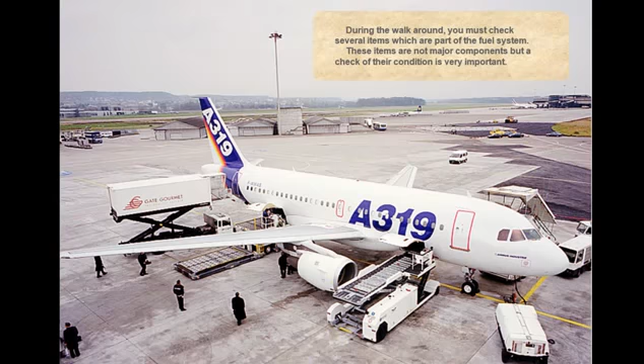Fuel can be measured manually by the magnetic fuel level indicators located in each fuel tank. We are looking at a magnetic fuel level indicator in the right inner tank. It should be flush with the aircraft surface.

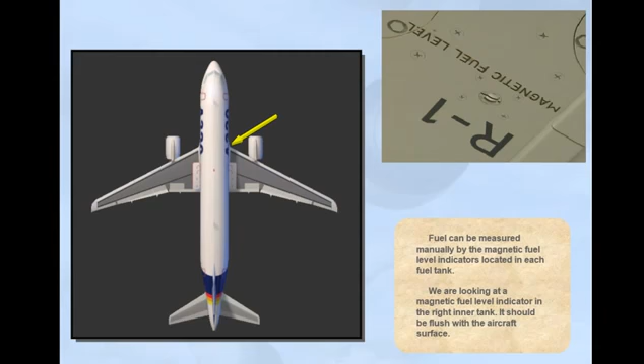We are looking at the water drain valve in the right inner tank. Each tank has a water drain valve. You should check that there is no water leaking from the valve. If there is a leak, call maintenance.

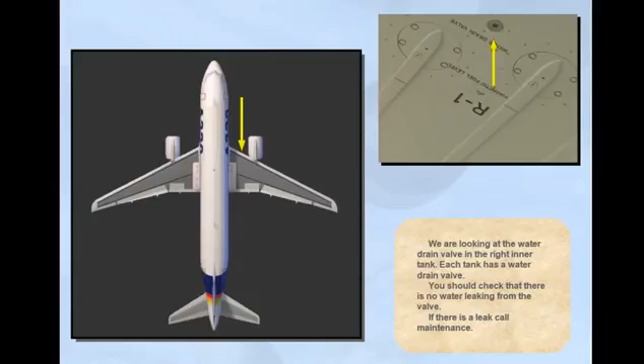A refuel panel is located on the fuselage side beneath the right wing. You should check that the refuel panel access door is closed.

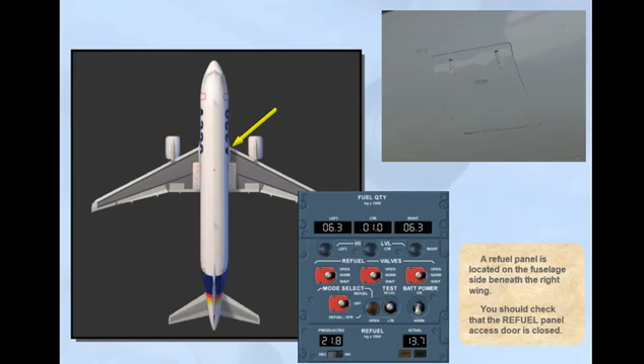A single refueling point is installed under the right wing. You should check that the refuel coupling door is closed. Note: another refueling point can be installed under the left wing as an option.

A surge tank is connected to the outer tank in each wing tip. These small tanks protect the system against overpressure and thermal expansion. You cannot monitor or control surge tanks from the cockpit. The surge tank inlet should be clear of any blockage.

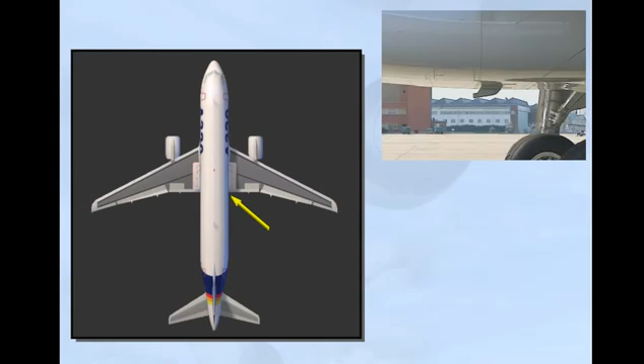There is also a shroud drain mast, which drains fuel that could leak from the system. You should check that there is no fuel leaking from the mast.

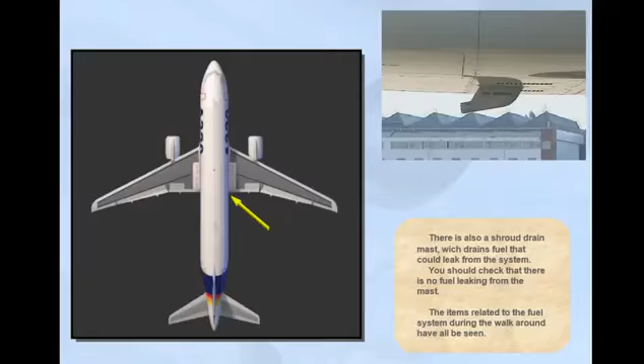The items related to the fuel system during the walk-around have all been seen. We will now discuss items related to the fuel system that you will encounter during cockpit preparation.

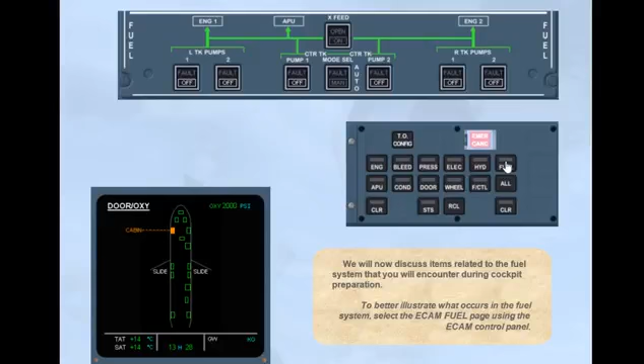To better illustrate what occurs in the fuel system, select the ECAM fuel page using the ECAM control panel. With the pumps in the off position, observe the symbology on the ECAM. The pumps are cross-line amber.

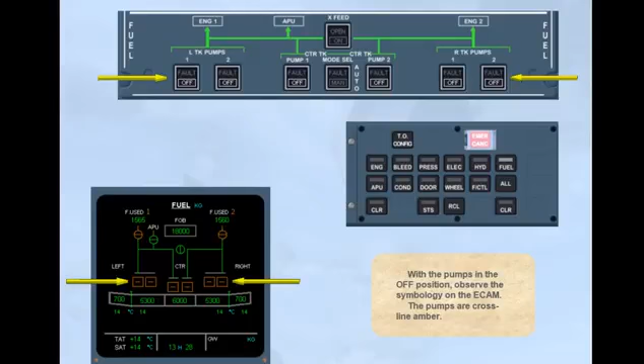During cockpit preparation, all white lights in the cockpit must be extinguished.

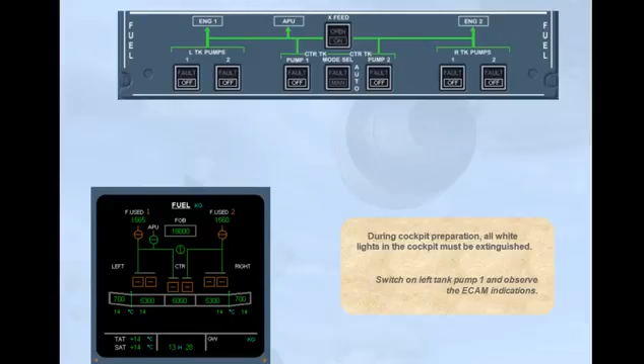Switch on left tank pump 1 and observe the ECAM indications. Left tank pump 1 on the ECAM fuel page is inline green, indicating that the pump is running.

Continue by switching on left tank pump 2. Left tank pump 2 is now also running.

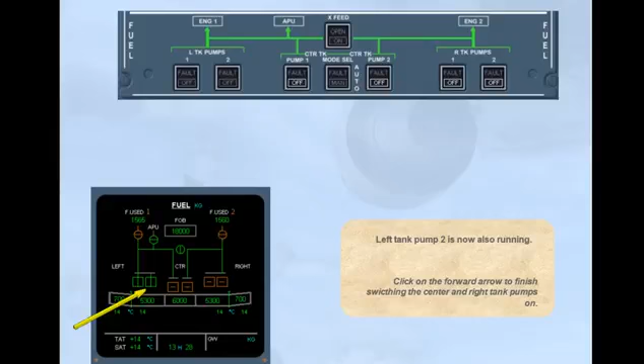Click on the forward arrow to finish switching the center and right tank pumps on. All the pumps are now running.

Before you continue, you observe a message on the engine warning display. Click on the forward arrow to display the engine warning display. The message 'Refueling' displayed on the engine warning display indicates that the refuel control panel door is open.

Now let's continue the pre-flight by inserting the fuel weight in the MCDU. We have typed the fuel weight in the scratch pad for you. Note: you can insert the fuel weight in the MCDU while refueling is in progress.

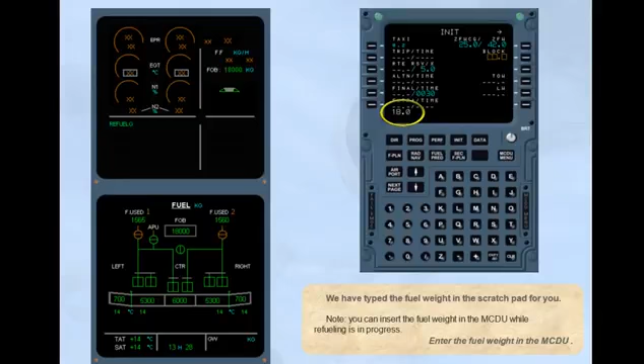Enter the fuel weight in the MCDU. Click on the forward arrow to continue.

A few minutes later, you observe that the refueling message on the engine warning display has disappeared, indicating that refueling is complete and the refueling control panel door is closed.

Now that the fuel weight has been entered, let's verify the FOB. Note: the minimum fuel quantity for takeoff is 1500 kilograms.

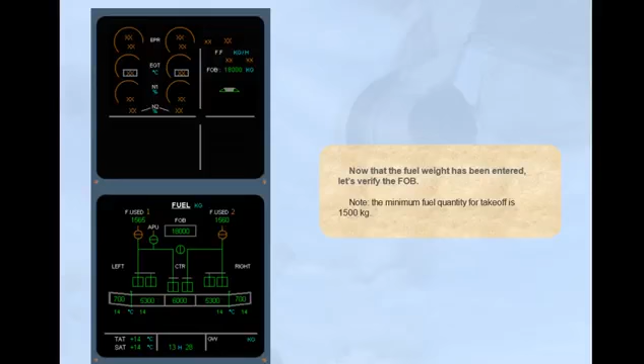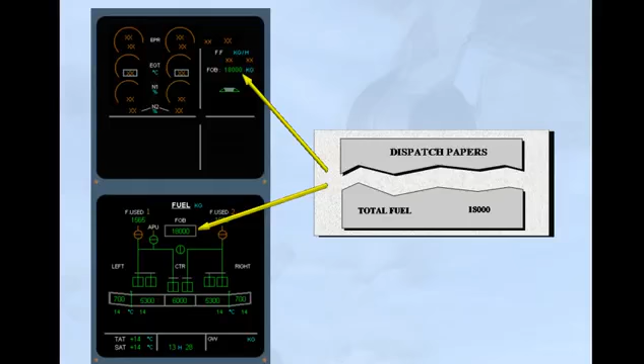Verify that the fuel on board quantity on the engine warning display and on the ECAM fuel page corresponds to the fuel required by the computerized flight plan. Verify also the fuel distribution in the different tanks.

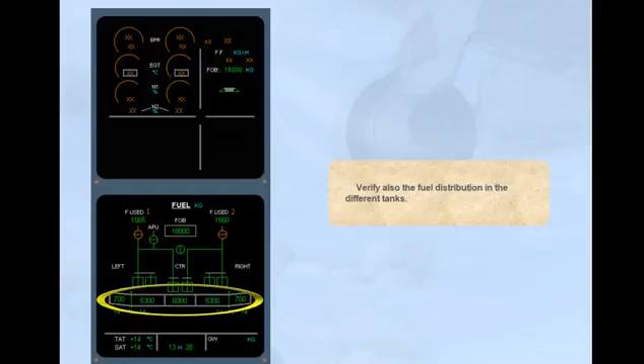It's now time to start the APU. Before we start it, notice that the APU low pressure valve is closed, crossline green, and the fuel line downstream from the low pressure valve is amber, indicating the APU is not running.

We have started the APU for you. On the ECAM fuel page, you can see that the APU is running because the APU low pressure valve has opened, inline green, and the fuel line downstream is green.

The items related to the fuel system during cockpit preparation have all been seen. We will now discuss items related to the fuel system that you will encounter during engine start.

The indications and starting procedures are the same for both engines. In our example, we will start engine 2 first.

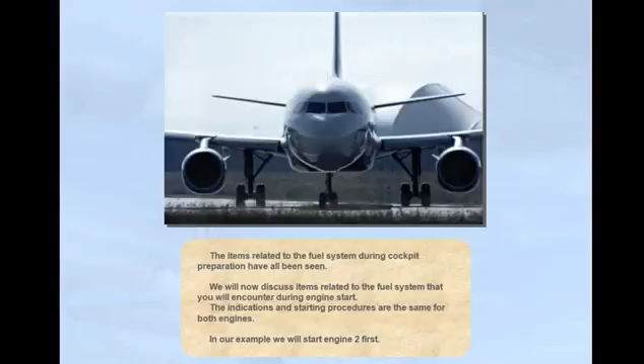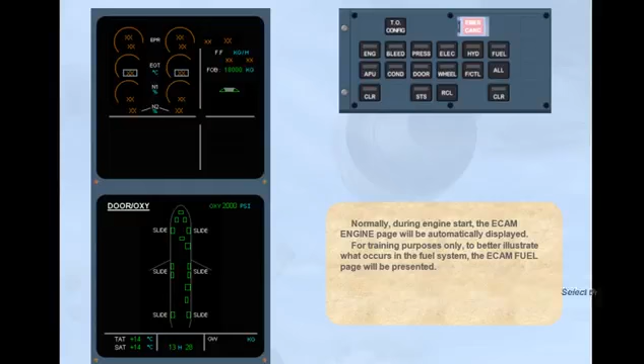Normally, during engine start, the ECAM engine page will be automatically displayed. For training purposes only, to better illustrate what occurs in the fuel system, the ECAM fuel page will be presented. Select the ECAM fuel page on the ECAM control panel.

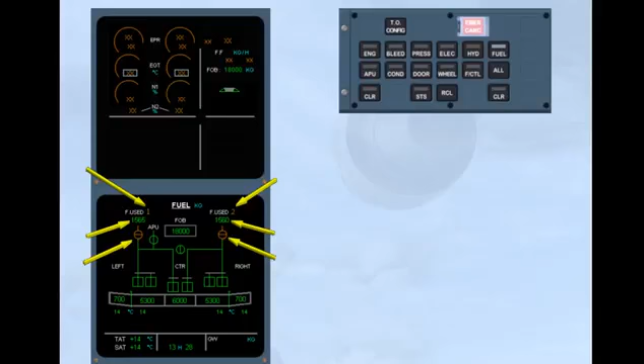Before we start the engine, observe the following. The engine low pressure valves are crossline amber to indicate closure. The fuel used quantities remain from the previous flight. Engine identification numbers are amber, because the engines are not running. On the engine warning display, the fuel flow indicates amber crosses.

Engine 2 is starting. Observe, the low pressure valve is inline green. The fuel used indication automatically resets to 0. On the engine warning display, fuel flow starts. The engine identification number 2 changes to white. The gross weight has now appeared.

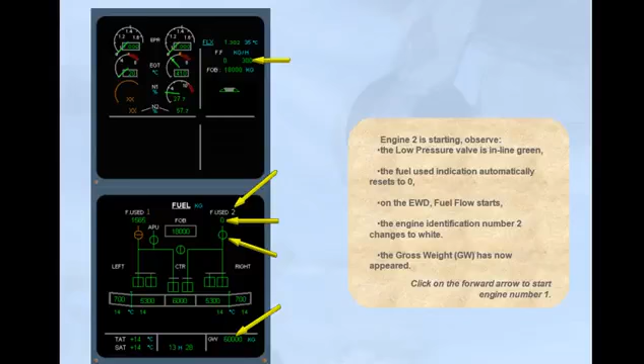Click on the forward arrow to start engine number 1. Engine 1 is starting. Observe, the low pressure valve is inline green. The fuel used indication automatically resets to 0. On the engine warning display, fuel flow starts. The engine identification number 1 changes to white.

Observe the message, Center Tank Feeding, has appeared on the ECAM engine warning display. This indicates that the center tank pumps are feeding the engines.

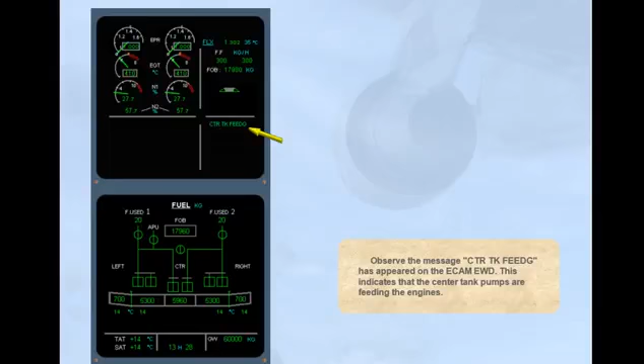The items related to the engine start have all been seen. We will now discuss items related to the fuel system that you will encounter during taxi.

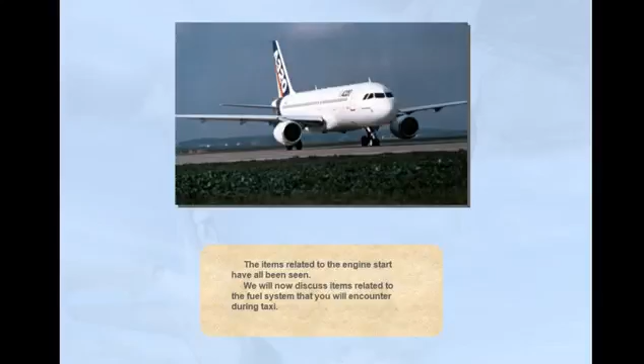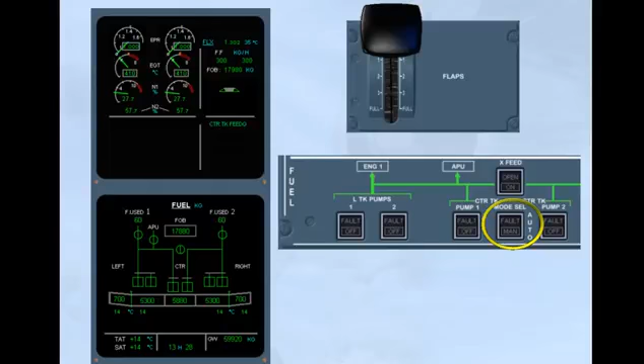When we extend the slats, you will see one of the automatic functions of the center tank pumps. Notice that the mode selector push-button switch is set to auto. Extend the slats and observe the indications.

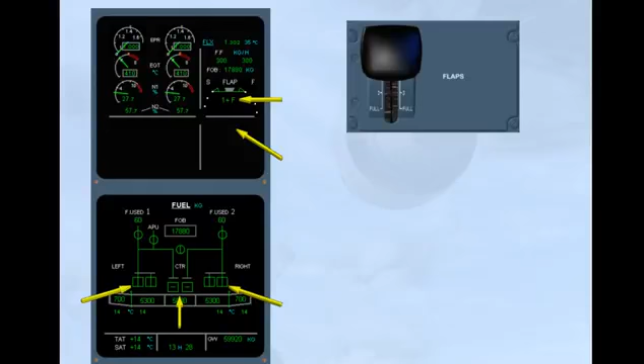Observe the flaps extending, the message Center Tank Feeding disappears. On the ECAM fuel page, the center tank pumps are crossline green, indicating that they have stopped running automatically. The inner tank pumps now feed the engines for takeoff.

The items related to taxi have all been seen. We will now discuss items related to the fuel system that you will encounter during normal climb, cruise, and descent.

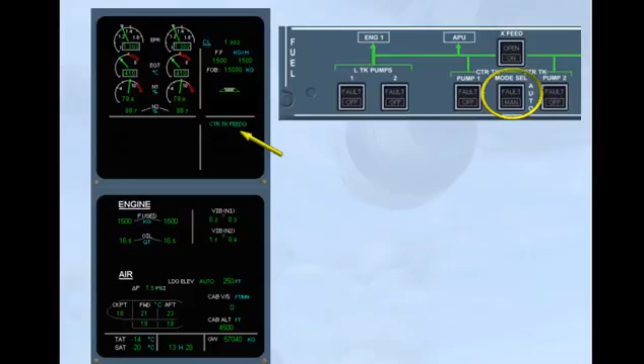You are in climb. The slats are now retracted. Observe the center tank feeding message reappears. This indicates, at slat's retraction, the center tank pumps are again feeding the engines. This is another automatic function of the center tank pumps with the mode selector push button in auto position.

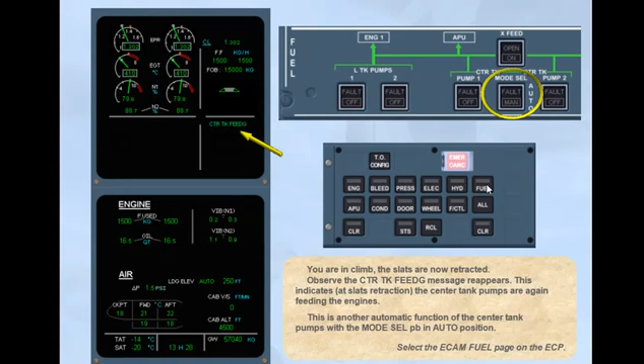Select the ECAM fuel page on the ECP. Observe the corresponding pump indications on the ECAM, in line green.

You are now in cruise. Notice the center tank feeding message has again disappeared, indicating that the center tank pumps have automatically shut off. However, the center tank is not empty and an auto function has again occurred. To explain why, we must look at fuel recirculation.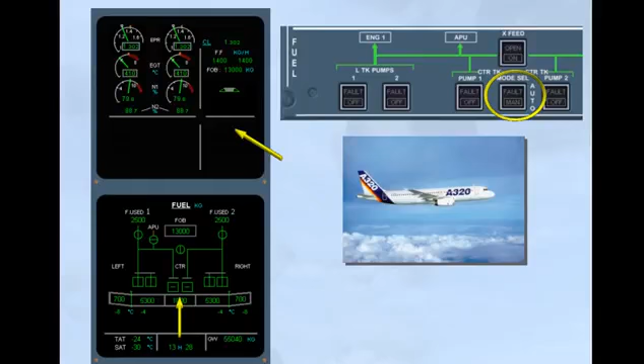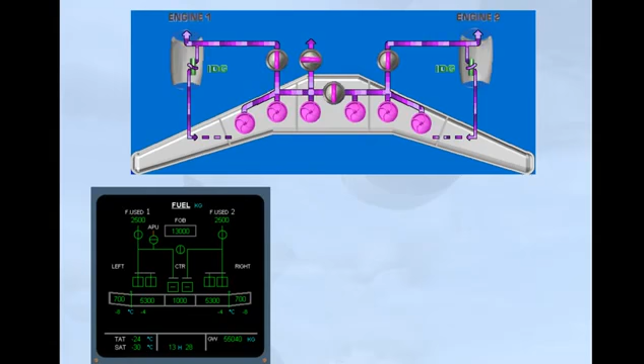Some fuel to the engines is diverted to cool the integrated drive generators, IDGs, then returns to the wing tanks. If the engines are fed from the center tank and the wing tanks are full, the center tank pumps automatically shut off. The inner tank pumps take over and feed the engines, so that there is room for fuel from the IDGs.

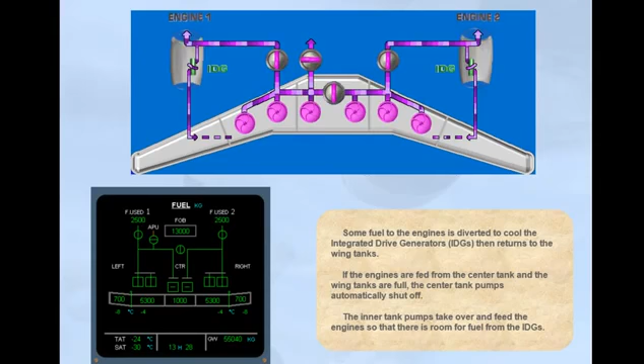After the inner tank pumps have fed approximately 500 kilograms of fuel, the center tank pumps automatically restart.

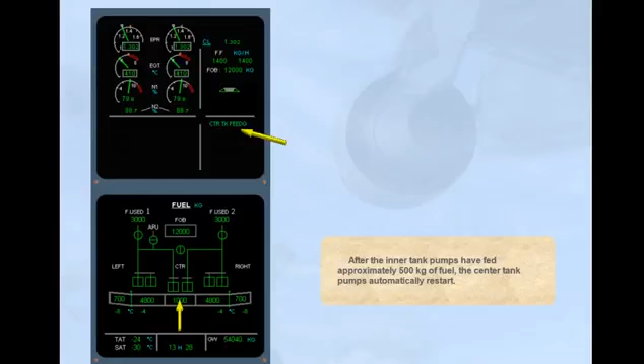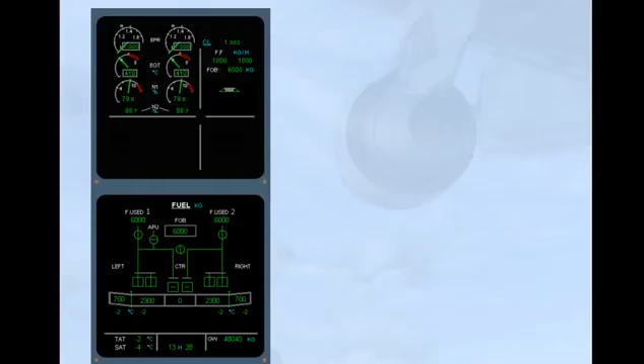You are in descent. To better illustrate the remaining indications, we will keep the ECAM fuel page displayed. The center tank pumps have automatically shut off, crossline green, because the center tank is empty. The inner tanks are now again feeding the engines.

Let's see what happens when the inner tanks reach a low level. When either inner tank reaches a low level limit, both transfer valves open automatically, transferring fuel from the outer to the inner tanks.

When at least one transfer valve is open, the message Outer Tank Fuel Transferred is displayed on the engine warning display.

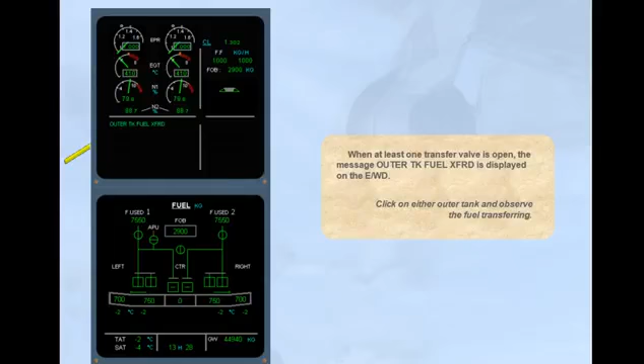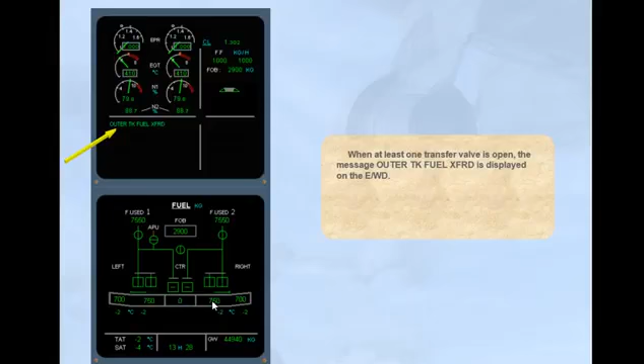Click on either outer tank and observe the fuel transferring. Click on either outer tank on the ECAM fuel page. The fuel is now totally transferred and the outer tanks are empty.

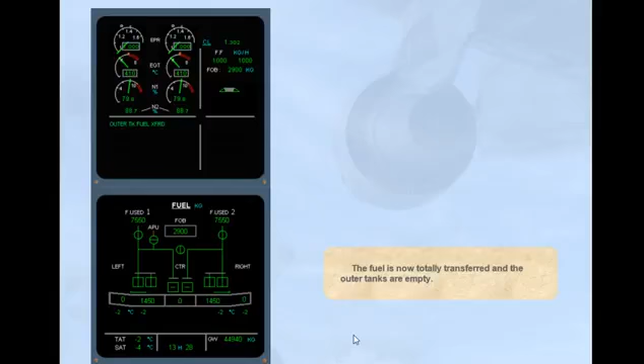The items related to the fuel system during climb, cruise and descent have all been seen. We will now discuss items related to the fuel system that you will encounter post-flight.

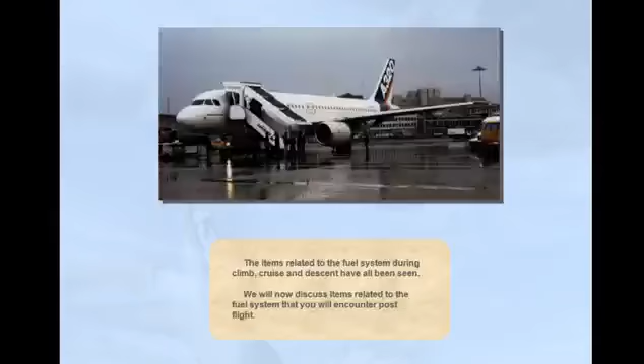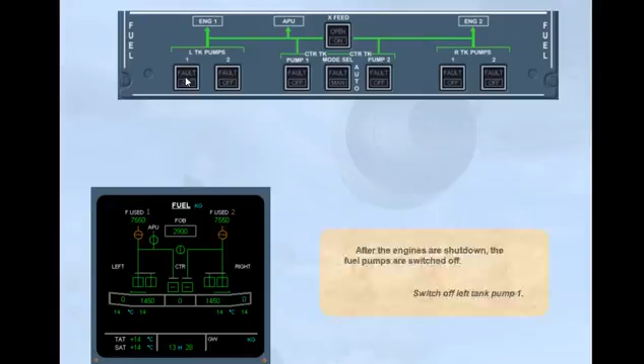After the engines are shut down, the fuel pumps are switched off. Switch off left tank pump 1. Left tank pump 1 is off, crossline amber. Continue by switching off left tank pump 2.

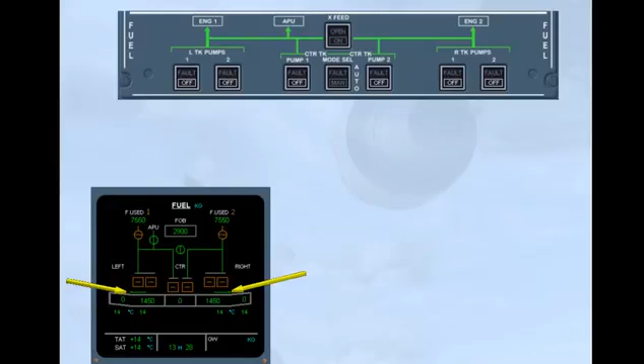Click on the forward arrow to finish switching the center and right tank pumps off. Observe the transfer valves remain open. They will be automatically closed during the next refueling operation.